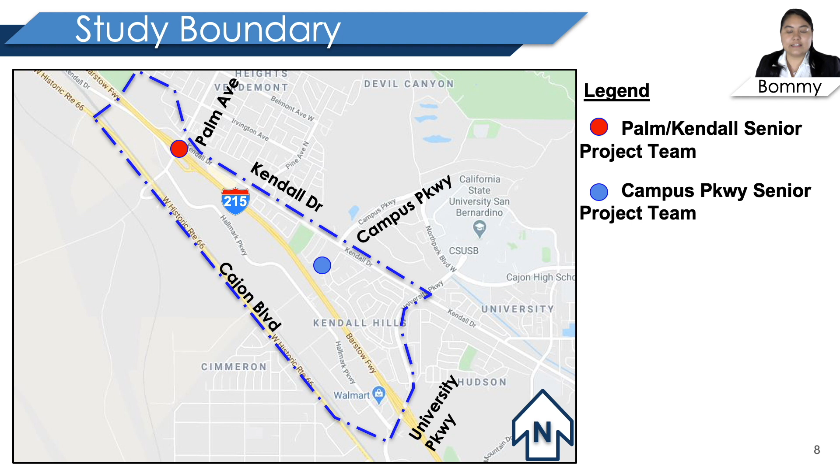With that, 3 needs were identified for our project. First, capacity and operations with Lily.

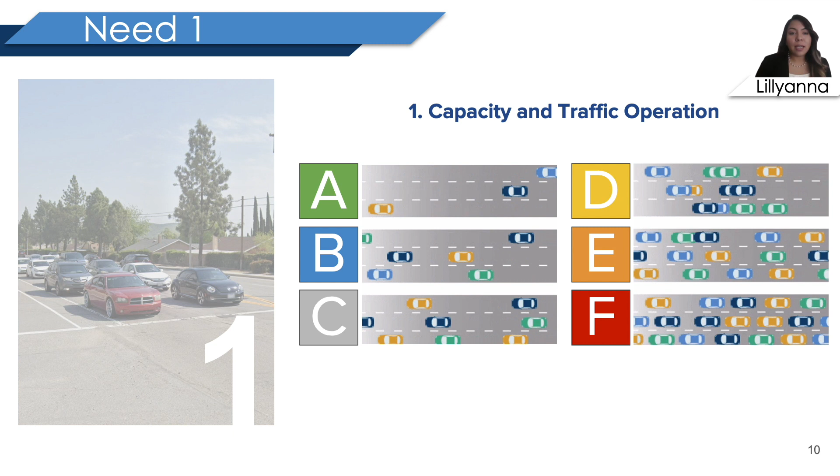When analyzing the traffic operational conditions, the traffic team used level of service using Synchro 10 to quantify the conditions. Level of service uses traffic volume and roadway capacity to determine what is a roadway's LOS. There are 6 levels, with A being free flow conditions and F having excessive backups due to congestion.

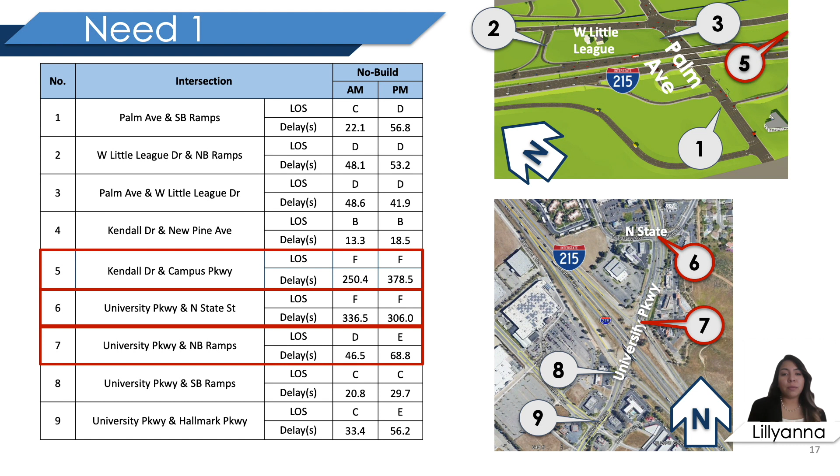The second need is to address regional population growth. Cal State San Bernardino has a projected 40% enrollment increase by 2040. The traffic growth rate in the area is 1.8% for our project area, and congestion increasing along local roads between the I-215, Palm Kendall, and I-215 University Parkway interchanges is caused by limited access across the 215 within the project limits.

The third need is to address accessibility across the I-215. Currently, the I-215 and Palm Avenue and the I-215 and University Parkway interchanges are scheduled to be improved to their maximum extent. Both interchanges provide a primary access from the I-215 to the city of San Bernardino and Cal State University San Bernardino. As traffic demands in the region increase, level of service on local roads are expected to decline.

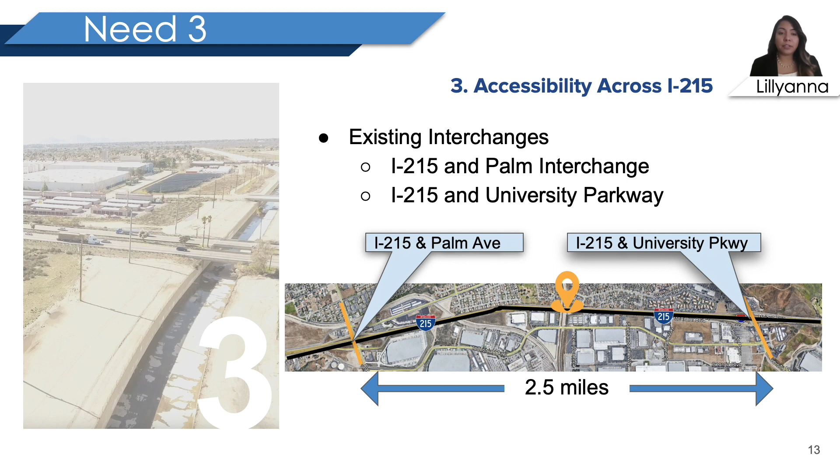So with those project needs in mind, the purpose of this project is to improve local circulation between Palm Avenue, University Parkway, Cajon Boulevard, and Kendall Drive. Also, to reduce congestion and to accommodate projected population and volume demand for the 2045 design year. And lastly, to provide additional access across Interstate 215 for pedestrians, non-motorized, and motorized modes.

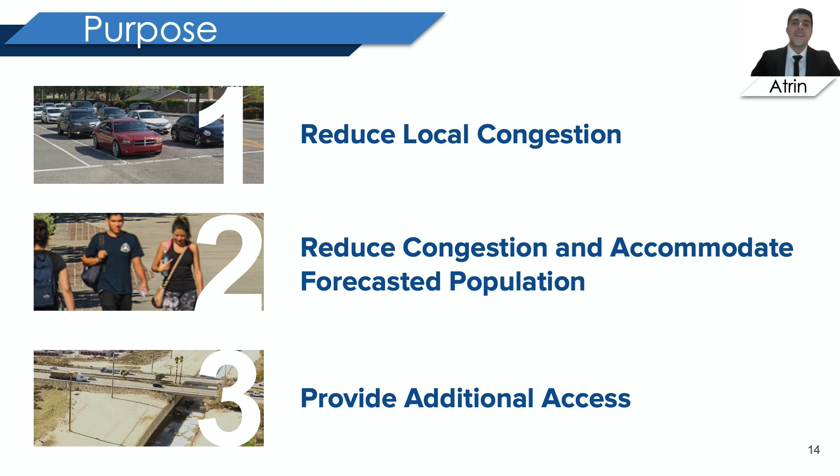Next, I will hand it off to Camille to talk about environmental considerations. The environmental team's largest deliverable is the preliminary environmental analysis report. In this report, there are major topics to look into. We have identified the ones highlighted in red as the ones within our project area that could have potential positive or negative effects.

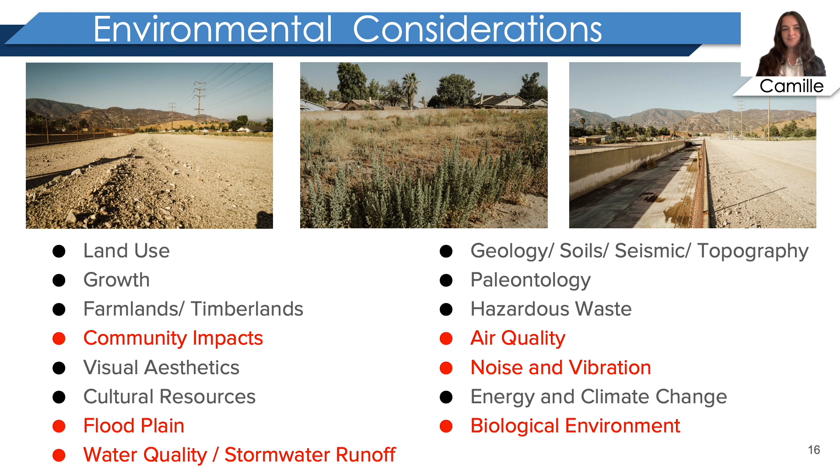The first being community impacts. We are providing more bike and pedestrian access with 3 of our alternatives and more bus access with 1 of our alternatives. The largest effect on the community is the need to obtain and buy right-of-way from different homes and businesses. After looking at this, we decided to add a retaining wall in certain locations, which allowed us to save homes and businesses. Additionally, our project area has different land uses, such as residential, industrial,

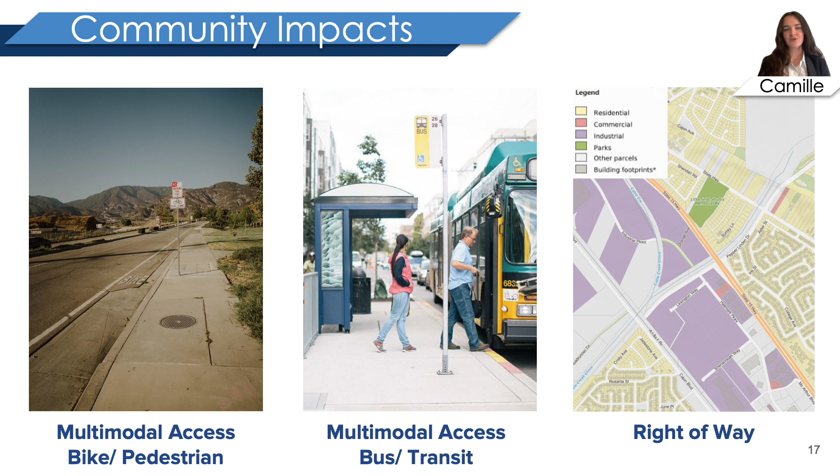commercial, and the San Bernardino County Flood Control District, which now Mimi will talk about. The Campus Parkway connection runs parallel to Devil Creek Diversion Channel. Because of this, most of the project sits inside a 100-year floodplain or an area of flooding controlled by a levee.

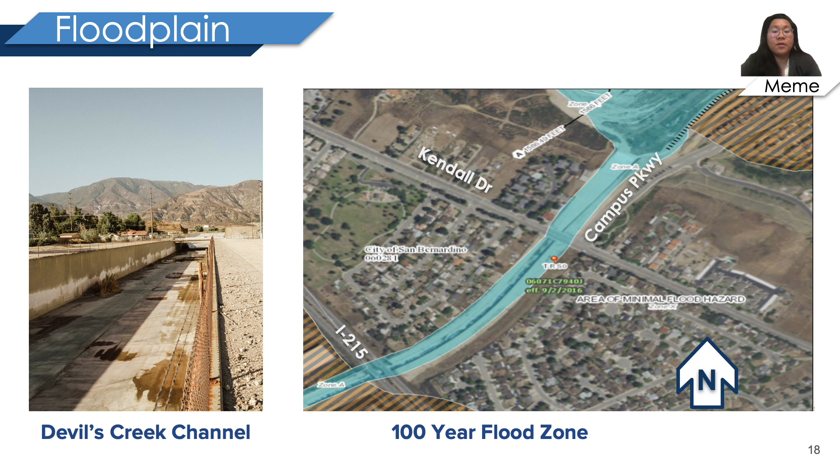With this large floodplain, there is also an issue of stormwater runoff. Through the implementation of best management practices, these issues could be mitigated by adding proper drainage systems and a stormwater pollution prevention plan, as outlined by the San Bernardino County Flood Control District.

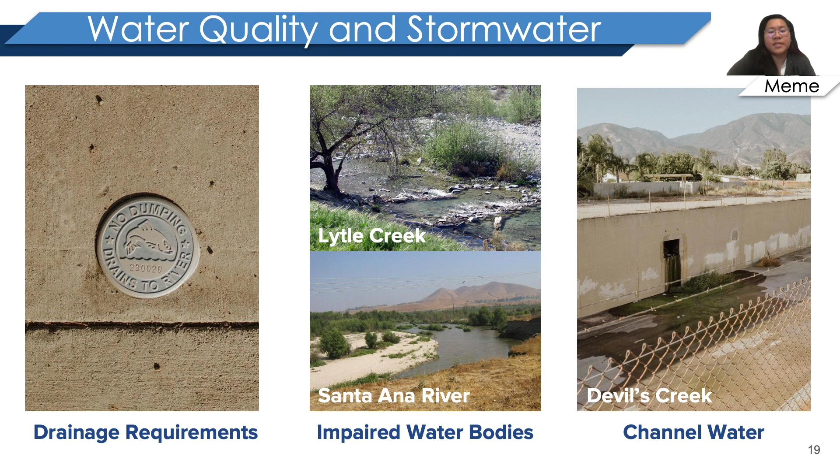Both our traffic and design team took this factor into consideration when going over our alternatives. The project is not only parallel to a channel, but located parallel to residential homes. A sound wall is to be considered due to the noise that may come during and after construction, along with the sound analysis for the area.

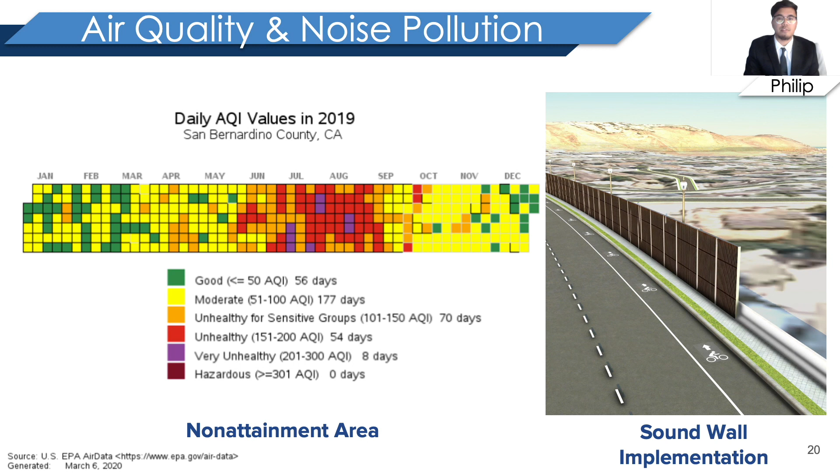For biological resources within our project area, 3 species have been identified. Proper mitigation techniques, such as relocation of a species, was thought to be the best tactic, not only to ensure the completion of the project, but also the safety and prosperity of the species. Some permits needed would be an incidental take permit for the San Bernardino kangaroo rat, or a voucher collection permit for the endangered plants for relocation.

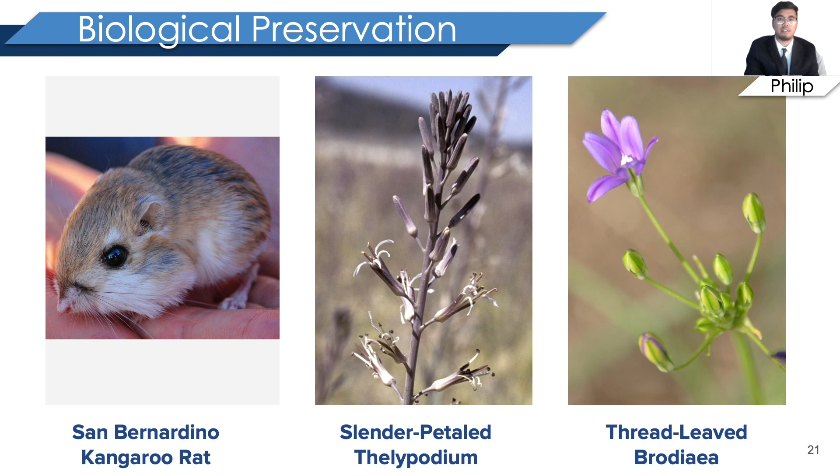And now I will hand it over to Atrin to talk about our design alternatives. Thank you, Philip. To find the best solution, we challenged ourselves to think outside the box. After many amazing ideas, the following 4 alternatives were chosen for this project: Alternative 1, the diverging diamond interchange. Alternative 2, hook ramp hybrid. Alternative 3, overcrossing. And alternative 4, shuttle service with a parking lot.

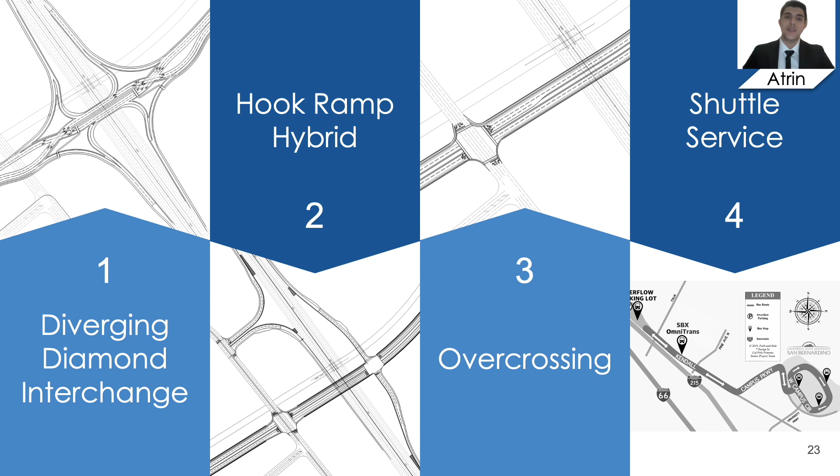Here is Steven Lee to talk more about our first alternative. This is an overview of our first alternative, the diverging diamond interchange, or DDI. Here's a demonstration of one phase of the DDI. As you can see, traffic transitions from the right side to the left as drivers cross the intersection. Drivers can then freely make a left turn onto the freeway or continue straight, where traffic will transition back to the right side. The second phase will operate similarly in the opposite direction.

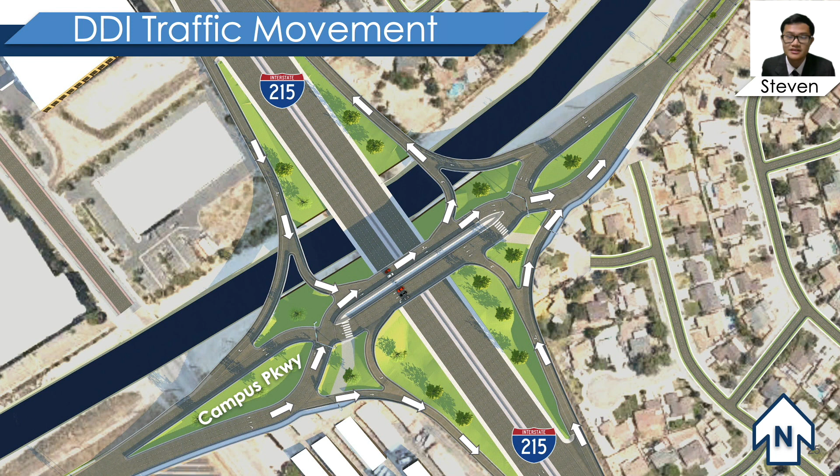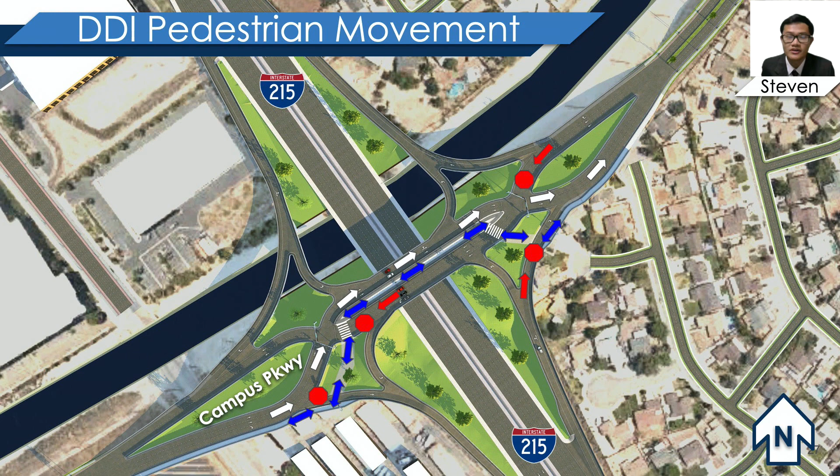Complete streets allow safe passage for all users. Cyclists can use the bike lane, which is shared with the right side in each direction. Pedestrians can use the crosswalk, which runs alongside the south side of campus, leading to the center median as shown in blue. Pedestrians will only cross during the westbound stopping phase. Southbound on and northbound off will also be signalized to accommodate.

The DDI is an innovative design with several benefits. It eliminates crossing left turns, which increases safety by reducing the number of potential conflict points. It also consists of a 2-phase operation, eliminating the left turn phase. Because there are only 2 phases, traffic can move in and out of the interchange quickly. Lastly, the DDI accommodates for pedestrians and bicyclists.

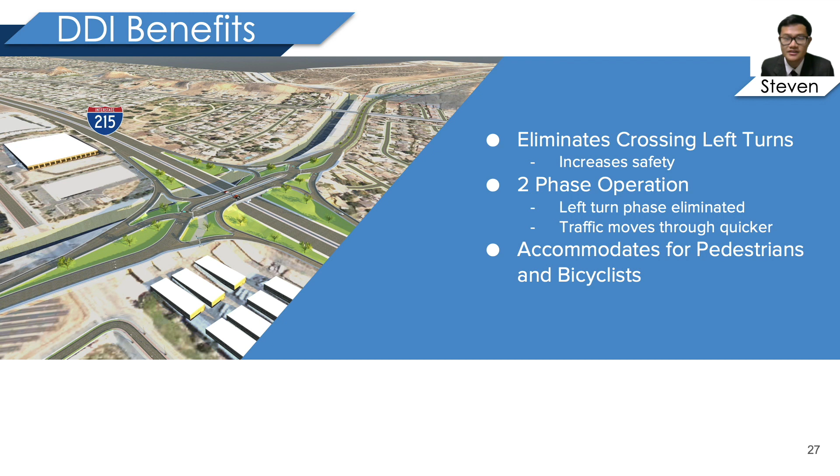And now Phu will talk about traffic. Thank you, Steven. After our design team was able to provide our traffic team with geometric layouts, we then modeled the alternative using Synchro 10, which allowed us to determine the level of service and delay times associated with each alternative for our 2045 design year.

For the diverging diamond interchange, the level of service for intersection 5 was found to be D and F for AM and PM. Moreover, our analysis also showed that the delay times of all intersections have reduced significantly. One of the key intersections, which is intersection 5, had delay time decreased by half, despite having the same level of service for PM peak hour when compared to no build.

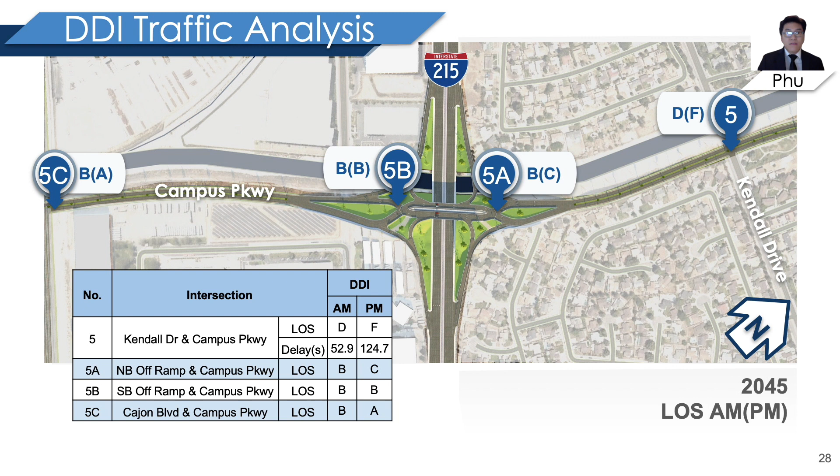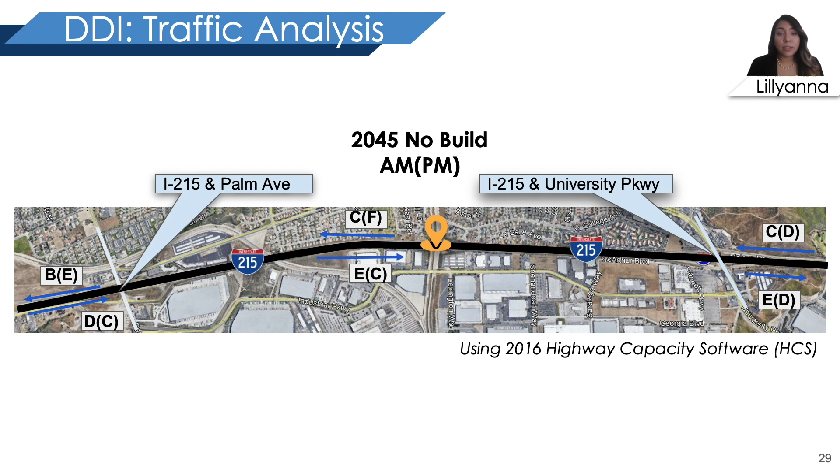Next, Lily will talk about our highway analysis. Because this alternative provides a new access to the I-215, we analyzed the traffic impact using the 2016 Highway Capacity software. This is the level of service for the freeway under 2045 no-build conditions. Once campus is built, the freeway will experience a decrease in level of service between University Parkway and Campus Parkway in the northbound and southbound direction.

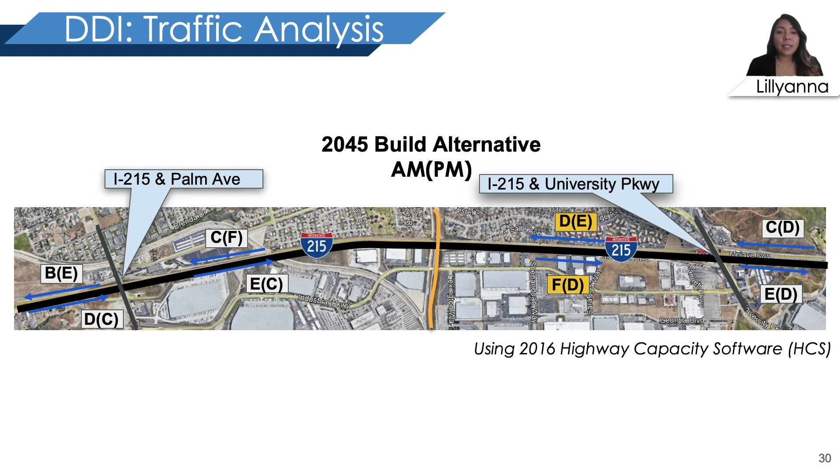To mitigate the impacted segments, we added one auxiliary lane in the northbound direction and two auxiliary lanes in the southbound direction.

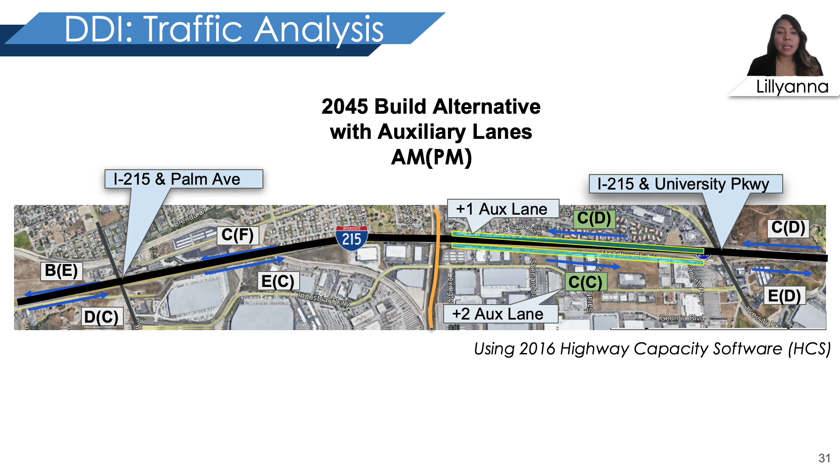The highway analysis was performed for the DDI alternative, and the next alternative that Peter will now talk about.

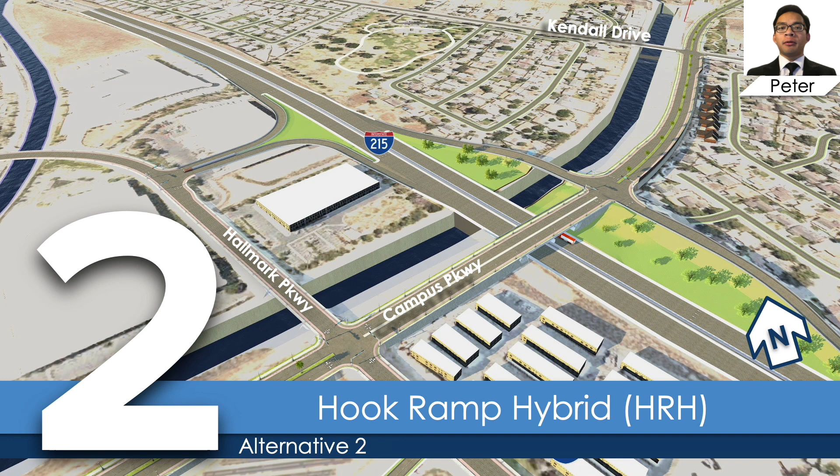Our second alternative is the hook ramp hybrid. This alternative features a tight diamond for the northbound ramps and a hook ramp for the southbound ramps. According to our traffic analysis, the AM peak will come from the freeways northbound, turning right onto Campus Parkway, and the PM peak will come from Campus Parkway onto the freeways southbound. The hook ramp hybrid can accommodate both of these major traffic movements with right turns as shown in the red arrows.

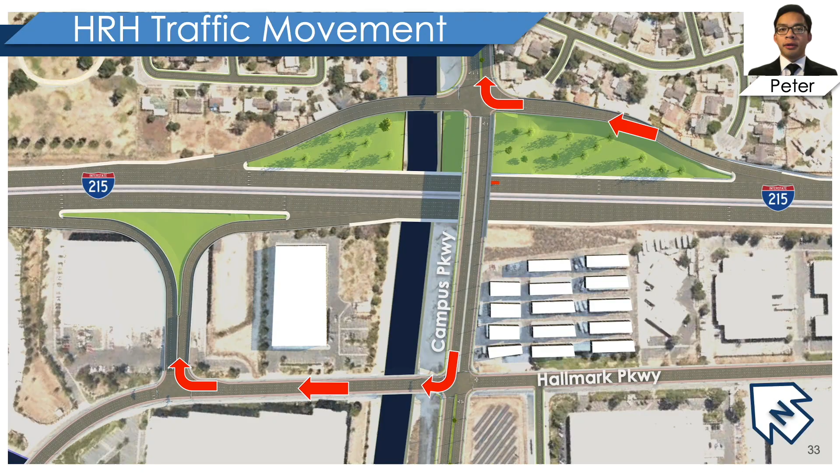Reducing left turning movements will improve traffic operations at the intersections within the alternative. The hook ramp hybrid has several key benefits. First, it can accommodate the major traffic movements during the AM and PM peaks with right turns as mentioned earlier.

Second, the hook ramp hybrid is a commonly used intersection, so users will be familiar with the layout, making it easier to traverse the interchange. And lastly, due to the proximity of Hallmark Parkway and the I-215, many of the alternatives that we considered could not connect Campus Parkway and Hallmark Parkway. However, the hook ramp hybrid can provide a connection between these two streets without sacrificing capacity while improving local connectivity.

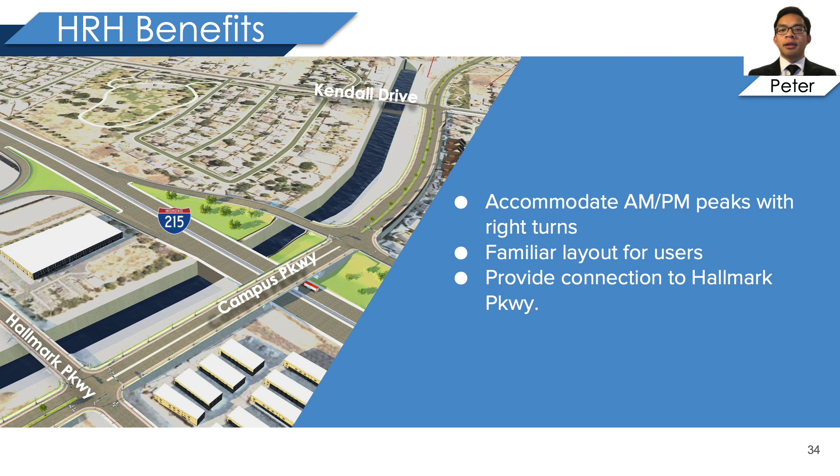Now Ryan will go over the traffic analysis.

Here are the intersections along Campus Parkway. 5A shows the new northbound ramps with a level of service of B and C for AM and PM. Also, 5B for the southbound ramp shows the same level of service. As you can see, there's an F for intersection 5. However, the delay was reduced by more than half.

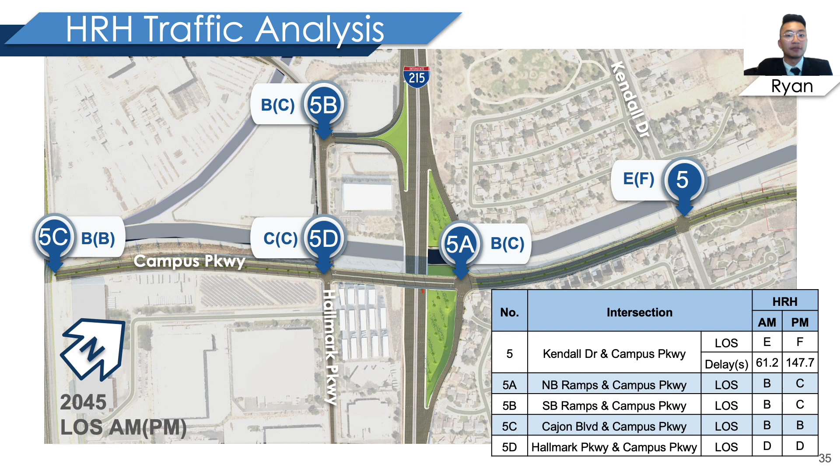Next, I will hand it over to Cassandra to talk about our third alternative. Alternative 3 is the overcrossing.

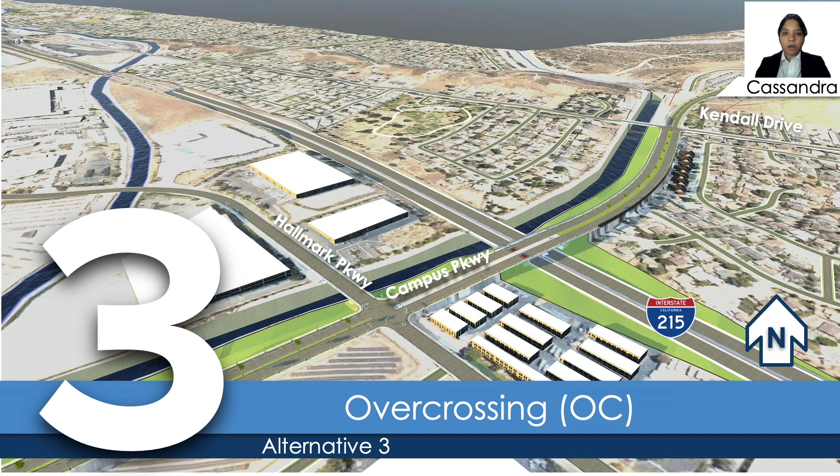This design consists of extending the existing Campus Parkway from Kendall Drive, going over the I-215, connecting at Hallmark Parkway, and then continuing on to Cajon Boulevard. The main benefit of this design is it allows access from one side of the I-215 to the other, which makes it easier for the local community to travel.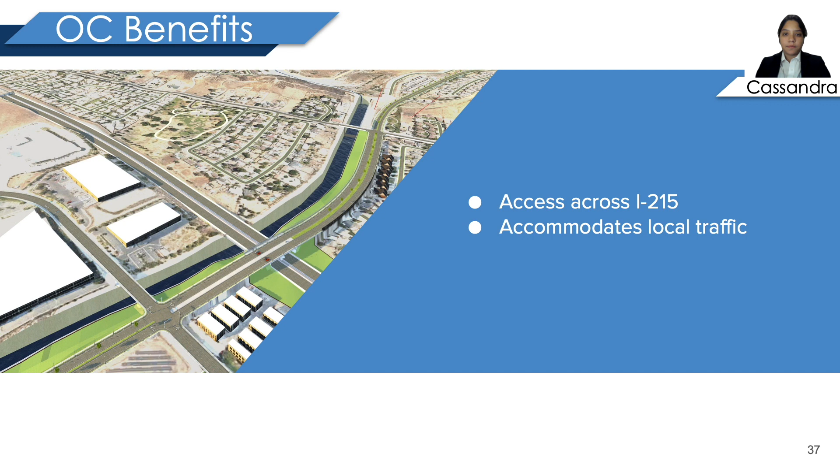Now Evan will go over the traffic analysis. This is the overcrossing layout with AM and PM levels of service. It shows the intersections that will be created with the overcrossing. The level of service for intersection 5 was found to be an F for both AM and PM. This is due to having to accommodate high traffic volumes from campus after the alternative is built, while other intersections have levels of service ranging from A to D.

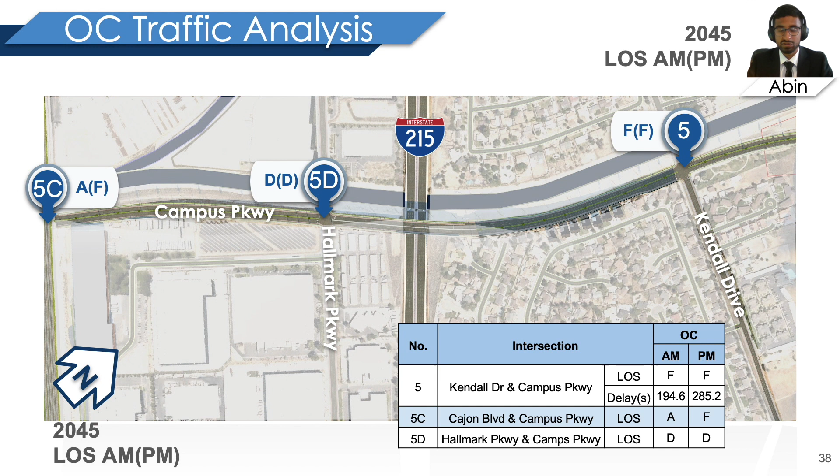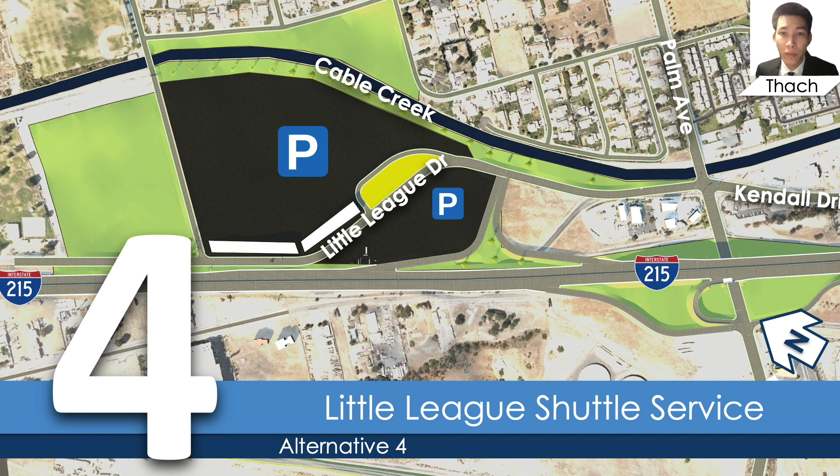And now Thach will talk about the next alternative. Thanks, Abin. Alternative number 4 is the Little League Shuttle Service. The Shuttle Service parking is located on Little League Drive, near Palm Avenue and Kendall Drive, along the I-215. It will provide 3,000 parking lots, 90 of them for accessible parking, and 50 lots for electric charging stations.

Some of the benefits of the Little League Shuttle Service are environmental friendliness, accommodating CSUSB's plan, avoiding adding a new freeway access point at campus, and also promoting business development around the area.

The Shuttle Service will provide a service route to CSUSB. The one-way drive from parking to campus is approximately 10 minutes, with one stop at SBX OmniTrans Station, which connects to San Bernardino Transit Center, and 3 stops within CSUSB campus to attract more students to use the service.

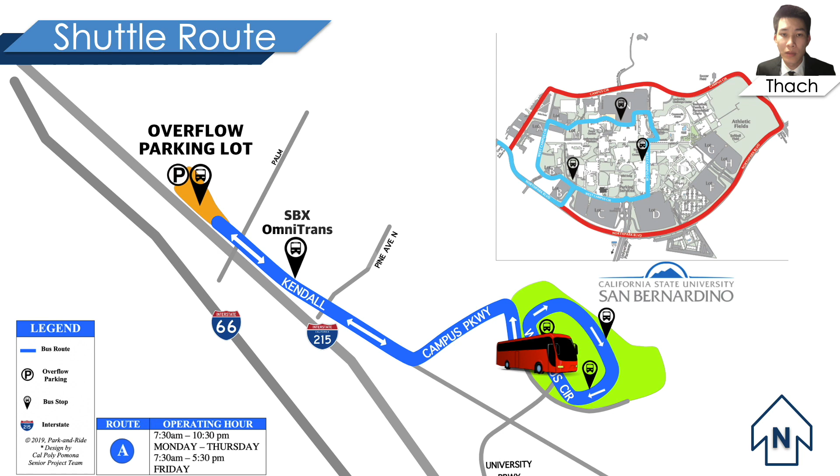With around 1,000 square feet reserved for business and restaurants, the Shuttle Service will promote business development in the area as well as providing a location for students to rest and eat while waiting for a bus. If a customer wants to stop and eat without a permit for parking, the business will validate their parking free of charge.

Now, Andrew will talk about the traffic side. The proposed alternative with parking and shuttle service incorporates Palm Kendall's team's alternative 1 and adds 3 new intersections. Some key items worth noting for this alternative are the reduction of delays and improvement of level of service along University Parkway. However, with the implementation of the shuttle service and the trips that it generates, we see level of service worsen and delays increase, more specifically on intersections 2 and 3.

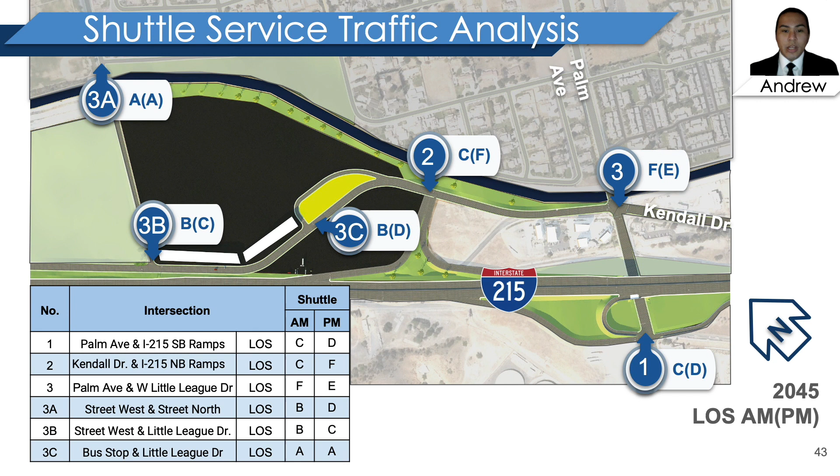With that, this concludes our analysis on our alternatives. Next, we'll be going over our benefits and costs.

The key considerations we use when analyzing our benefits are total delay, total vehicle stops, total fuel consumed, CO2 emissions, and connectivity. The total benefits is the amount of savings compared to a no-build. Next, I'll pass it over to Philip to go over the cost.

Before doing our decision matrix, we did a cost estimate where we manually figured out some considerations such as earthwork costs, pavement costs, structures, and right-of-way. For categories we could not quantify, such as drainage and construction staging, we used percentages based on prices we were able to find, depending on the alternative. The group was then able to come up with estimated total costs for each alternative.

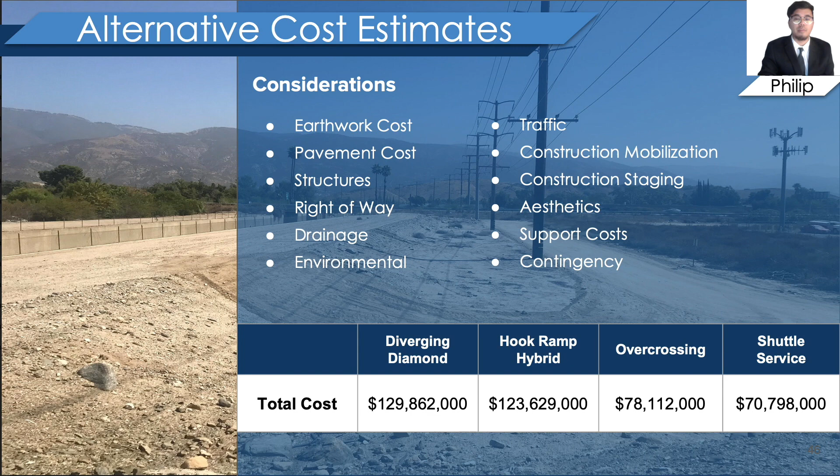The overcrossing, alternative 3, was found to be the best option not only for its low cost, but also for its overall benefits, where Ryan will talk about our BC ratio.

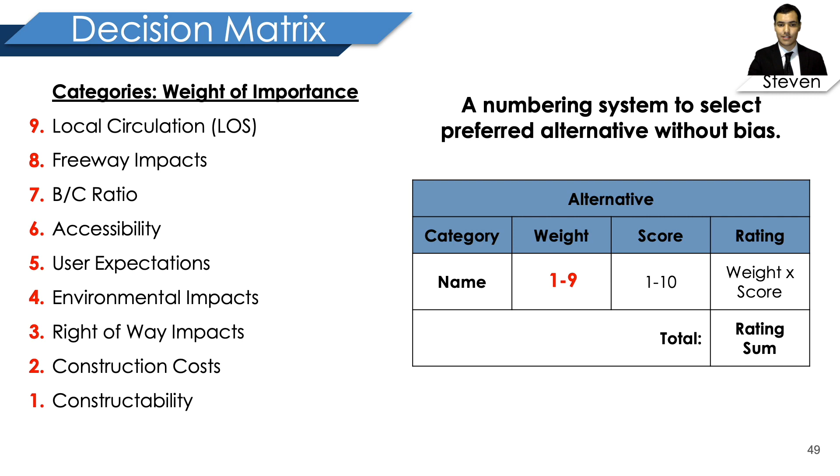Next, I'd like to pass it over to Steven and Bomi to discuss the decision matrix. The decision matrix was used as a means to determine the preferred alternative for a project without bias. The table on the right shows the methodology to the matrix. Categories with higher importance are attributed a higher weight, whereas categories with less importance are given a smaller weight. For our purpose and needs statement and project findings, the 9 categories to the left were unanimously ranked from highest to lowest importance respectively. Our 3 most important categories are local circulation, freeway impacts, and benefit cost ratio.

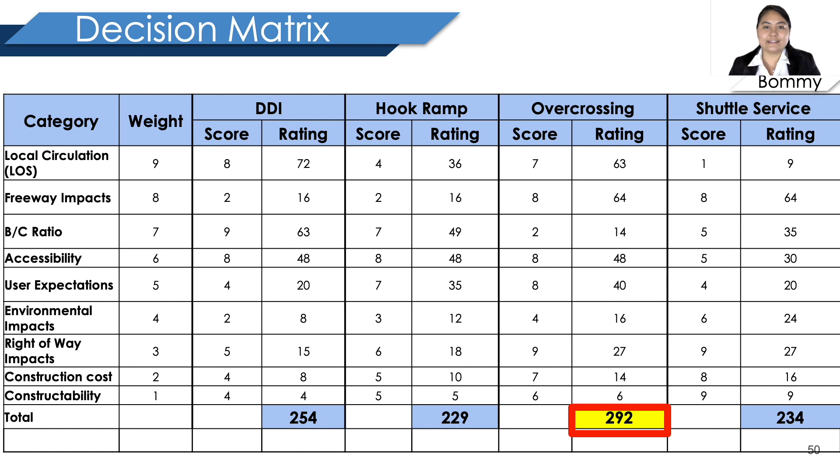Taking all these factors into consideration, the overcrossing was found to be the highest scoring alternative with a score of 292. Next, I'd like to pass it on to Lauren to present our preferred alternative.

Due to its simple design and the ability to reduce traffic congestion, the preferred alternative is the overcrossing. We would like to go more in detail about the overcrossing, but first, here is a drive-through video of the alternative.

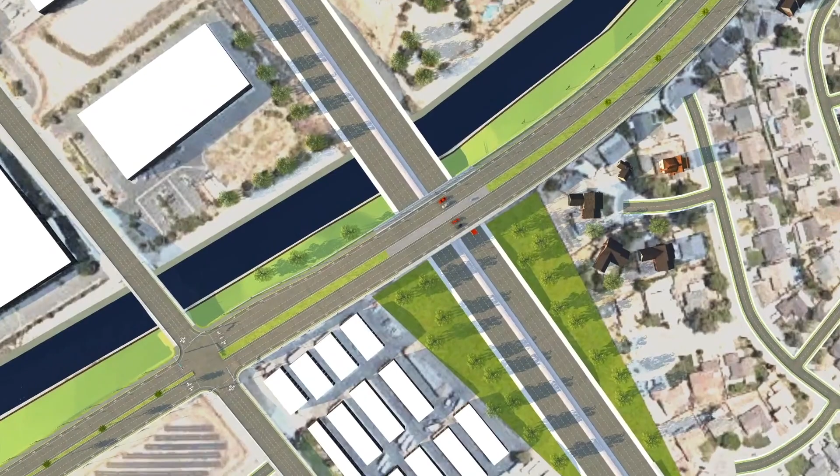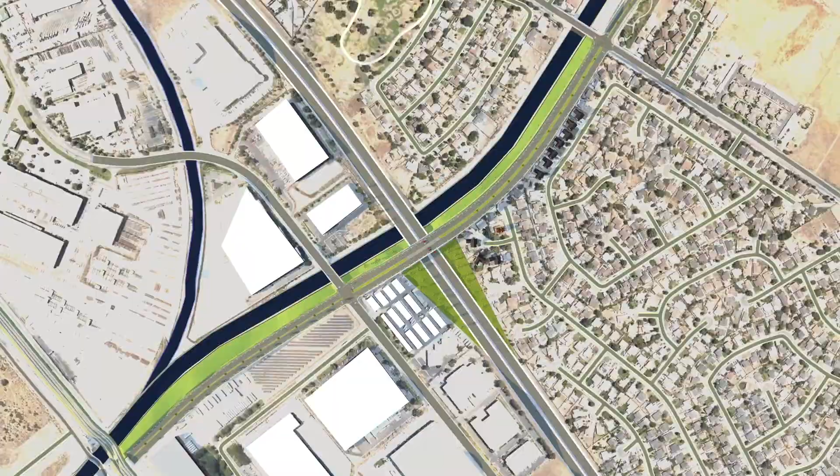Next, we'll go more in depth about the overcrossing. Here's Abin to talk about traffic, and here's the table of level of service for all intersections at Palm Avenue and University Parkway.

Most intersections produce a better level of service under 2045 traffic conditions when the alternative is built. Moreover, our analysis shows the delay times of most intersections have greatly reduced significantly. As you can see with intersection 5, the level of service may stay the same for build and no-build conditions, but the delay times have dramatically decreased. To improve the level of service of this intersection, the city may pursue further projects outside of our study boundary.

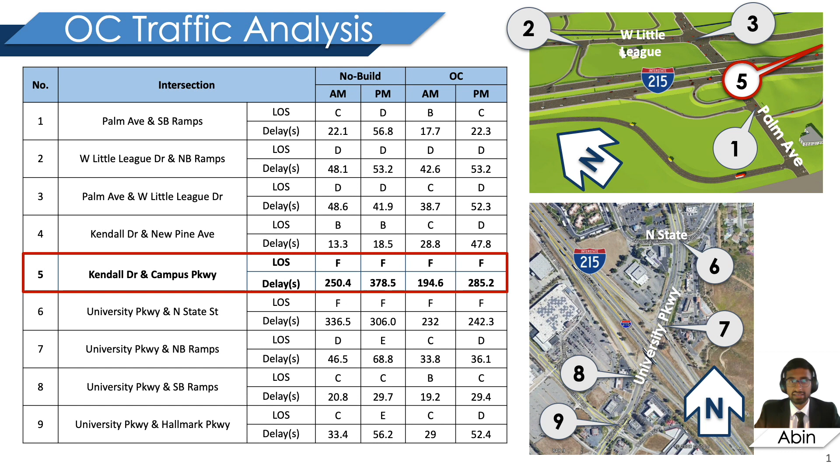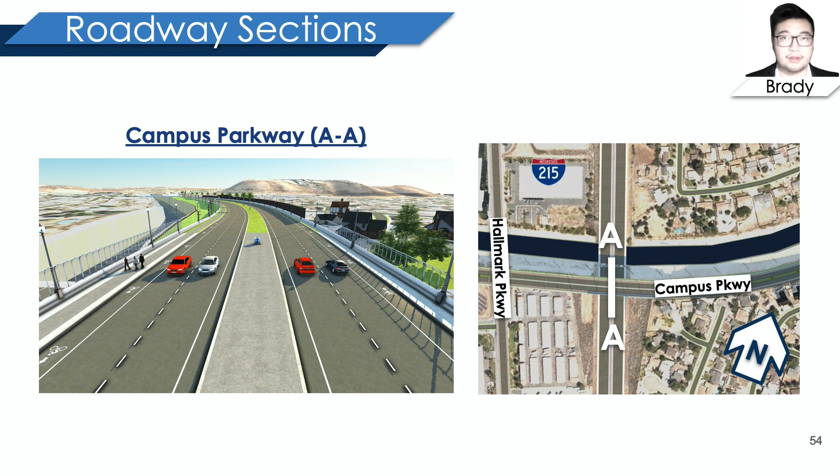Now Brady will talk about our roadway sections. There's a roadway section for our preferred alternative, the overcrossing. On the right, you're able to observe where section AA is, on Campus Parkway. On the left, you're able to observe a 3D rendering of Section AA. We have one 6-feet bike lane, two 12-feet through lanes, and two 4-feet shoulders on each side of the 16-feet median, with a 6-feet sidewalk on the north side.

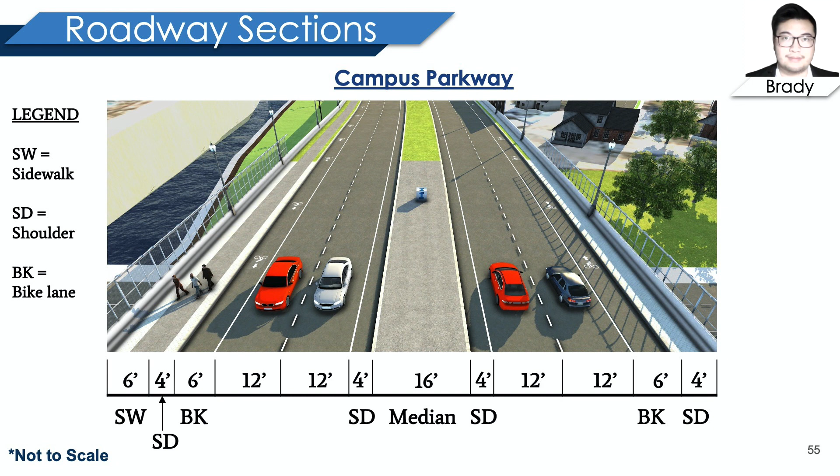Now I hand it over to Miguel, who will talk about the APS. Here we have the advanced planning study of the overcrossing. The overcrossing is composed of a cast-in-place pre-stressed box girder in order to follow the consistency of this type of superstructure in California. The substructure consists of column bents with pile foundations and two abutments, one at each end of the bridge. We designed the bridge to have a minimum vertical clearance of 16 feet 6 inches over the I-215 freeway at a point located near abutment 2.

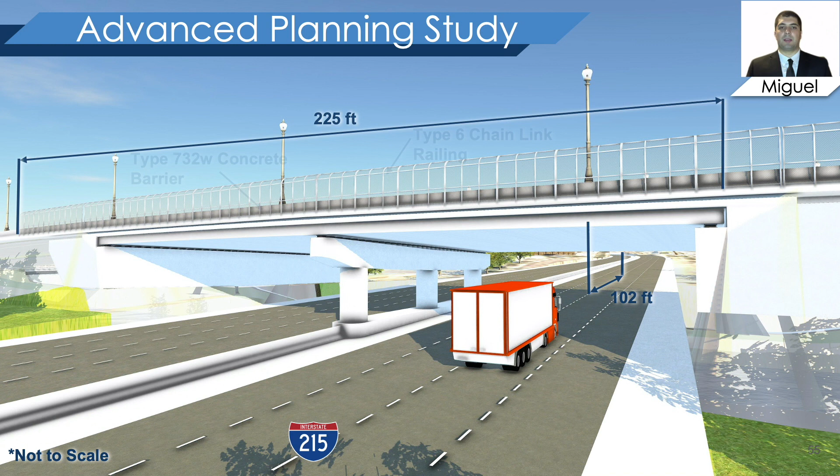In order to accommodate for vertical clearance and drainage, there is a 4% downgrade and upgrade on the vertical crest curve that has a span of 225 feet and a width of 102 feet. For safety barriers, we will have Type 732W concrete barriers with Type 6 chain link railing in order to secure the safety of pedestrians, bicyclists, and motor vehicles.

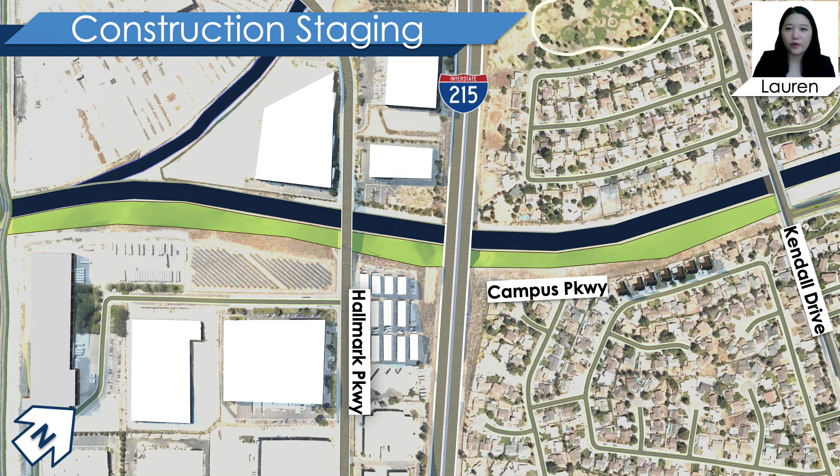Now we'll pass it on to Lauren to talk about construction staging. There is a total of 3 construction stages for our project. The first stage is connection of the northern segment with Kendall Drive and the beginning of construction of the bridge over the I-215.

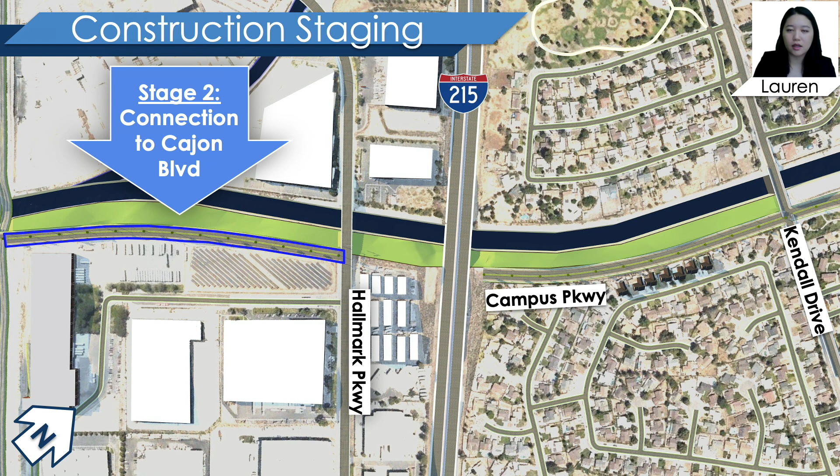Stage 2 is connection of the southern segment with Cajon Boulevard. Lastly, Stage 3 is construction of Hallmark Parkway and finishing up the bridge over the I-215. We chose this order to build our project so we may cause the least amount of disturbance to traffic flow in the area.

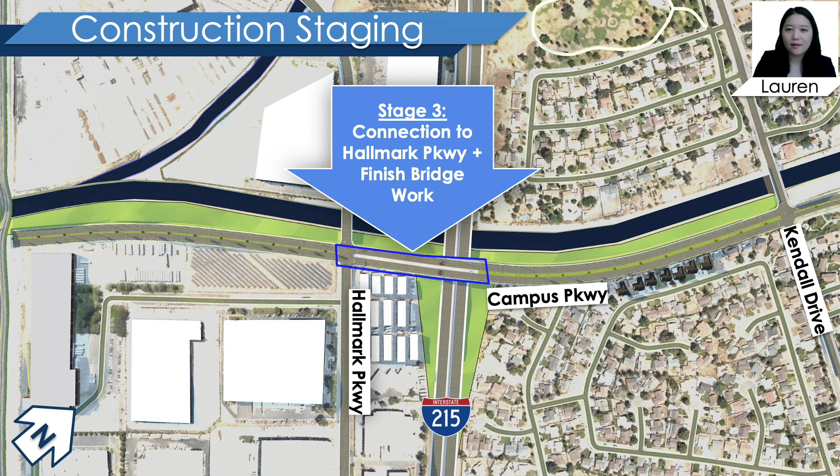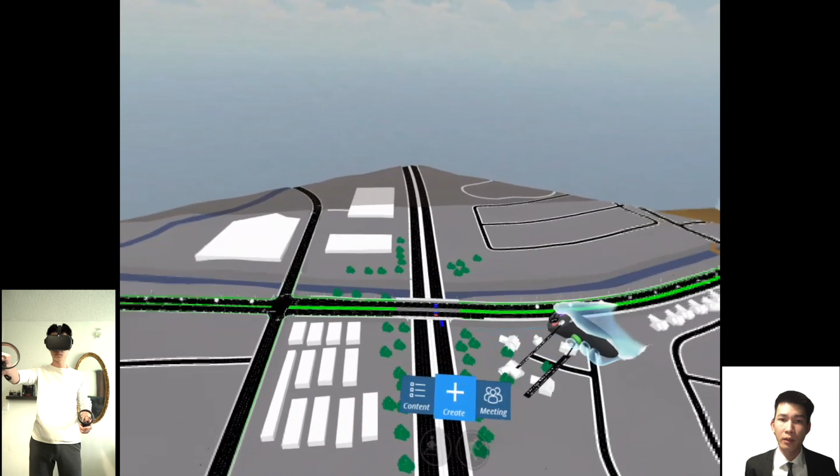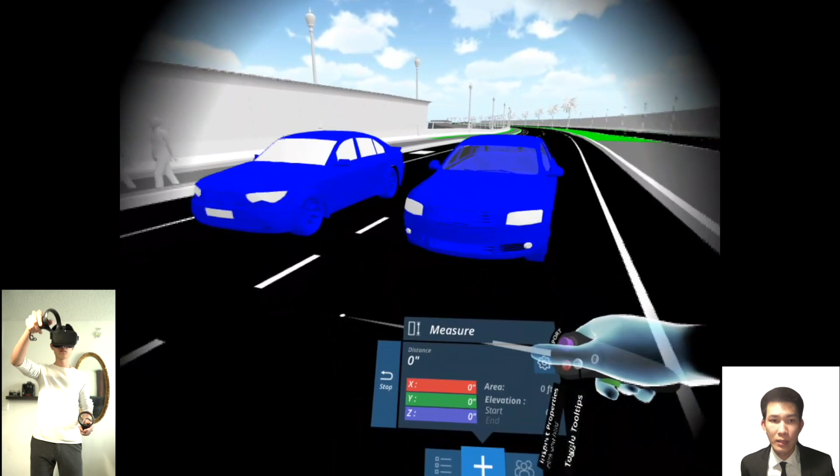Next is Tack to explain how we incorporate VR into our project. Thank you, Lauren. VR, AR are the future of the visualization field, and we would love to introduce it in this senior project. Not only can this be effective to communicate planning concepts, but they're also good for public hearings. Inside this 3D world, the viewer has the ability to move through a scene, walk around, measure dimensions of an object, take a note, look at pipes under the surface, and talk to other viewers as well. Viewers can also toggle between seeing the existing condition and proposed design to understand the options on the table.

While it's not entirely the same as having the headset on, you can check out the scene in 3D mode that we created for the overcrossing and DDI alternative by simply scanning the QR code with your camera. Lastly, we'd like to share with you a video that we made to describe our project to the general public.

In the past century, California has seen rapid growth in its population. The warm weather, the beautiful beaches, and the amazing landscape inspires people from not only other states, but other parts of the world to dream about living in this state. The economic opportunities and living convenience encourages young dreamers to move here and old families to stay. As businesses continue to thrive, transportation becomes more constricted in the cities most call home. Because of this, businesses are reaching out to seek space for infinite development.

This is the city of San Bernardino. Known mostly for its seasonal music festivals, the city is surrounded from north to east by mountains, leading thousands of Southern California residents to Big Bear Lake for some winter snow. Interstate 215 cuts right through the city of San Bernardino, creating an ideal location for new industries and families.

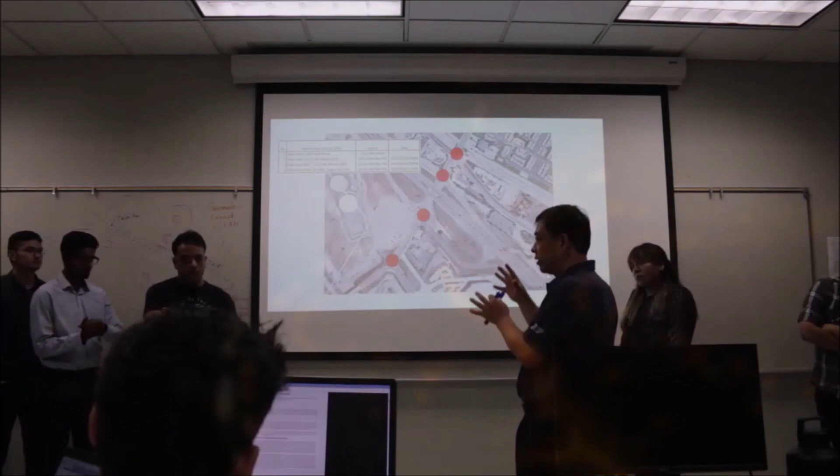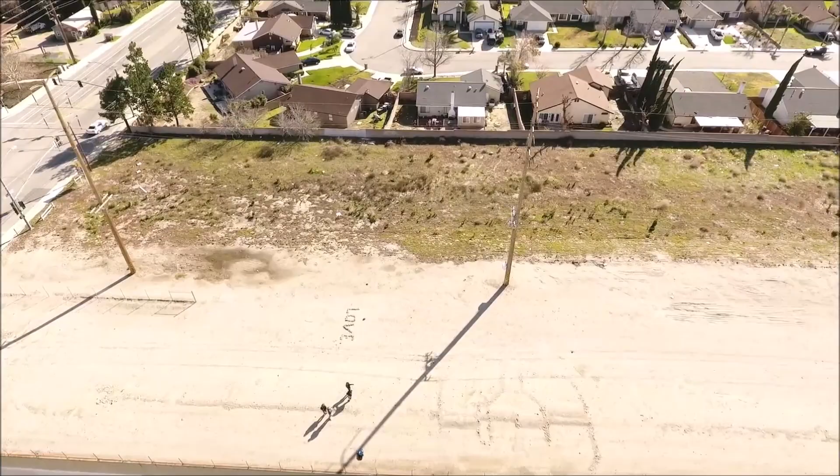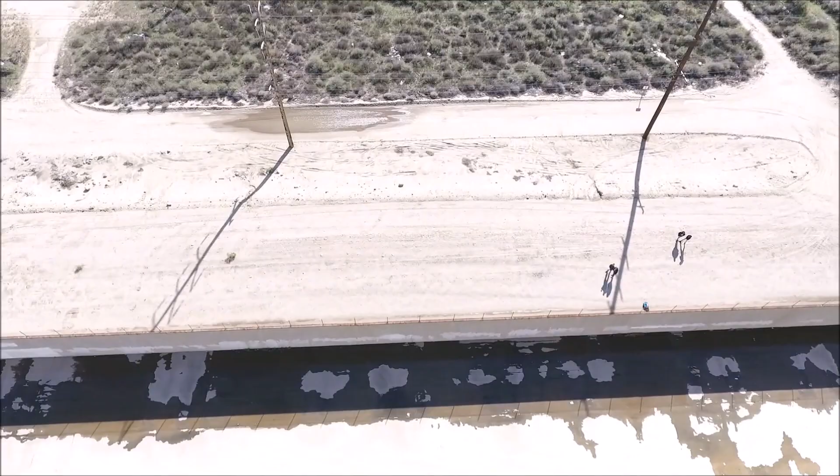As a team of 18 students over the course of 8 months, we have managed extensive research and analysis to determine the optimum solution to the given problem. This is Campus Parkway. Currently undeveloped, this location is between the existing University Parkway and Palm Avenue, and runs parallel to an existing water channel, managing to cross through Interstate 215.

Today, Interstate 215 has 2 lanes in each direction. We proposed an overcrossing bridge over Interstate 215, connecting both sides of the still undeveloped Campus Parkway, providing access across the freeway. This would satisfy the need to improve local circulation between Palm Avenue and University Parkway, as well as Cajon Boulevard and Kendall Drive.

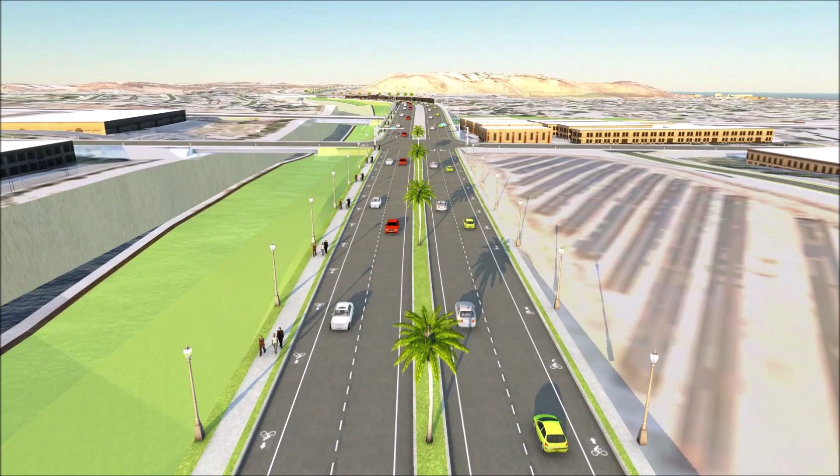This would also satisfy the need to reduce congestion and accommodate projected population and volume demand for the 2045 design year at the Interstate 215, University Parkway, and Palm Avenue interchanges by providing alternative routes. Moreover, the overcrossing at Campus Parkway will include accommodations for pedestrians and bicyclists to satisfy the need to provide additional access across Interstate 215 for pedestrians, non-motorized, and motorized vehicles.

Together, we believe that these improvements are beneficial changes in helping the city and California State University of San Bernardino to accommodate the anticipated future growth.